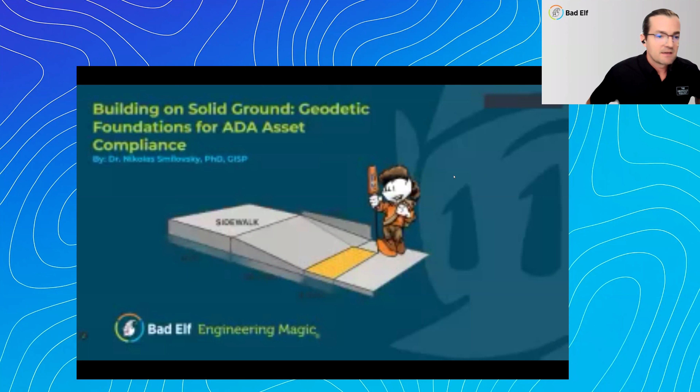I'm going to be our first presentation here. We're going to be discussing building on solid ground, geodetic foundations for ADA asset compliance. Our whole presentation from Bad Elf today is going to be really focusing on the importance of having a strong geodetic foundation to your ADA asset management.

So let's go ahead and jump in. We'll quickly do an industry solutions poll to see how everybody is feeling out there about the ADA world. We're also going to continue Tony's quick discussion on why ADA compliance matters. We'll segue into why accuracy, specifically spatial accuracy, matters for ADA compliance. We'll talk just very shortly about Bad Elf GNSS powered solutions.

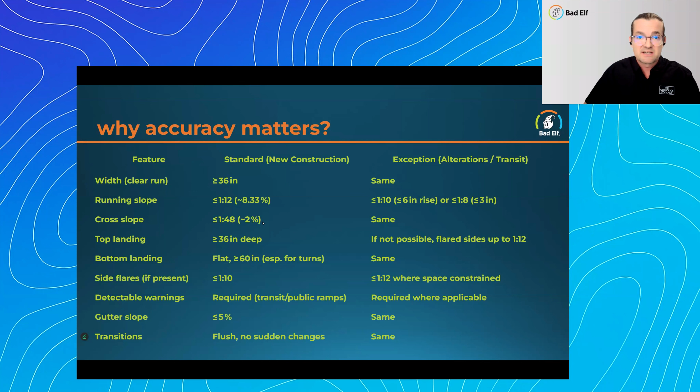If you're talking that a cross slope has to be under 2% grade, under 2% slope, that's a hard number to reach, right? And so if you're familiar with ADA, you've seen pictures like this and diagrams like this of different slopes and running slopes and cross slopes. But the point here I'm trying to make is this isn't super easy.

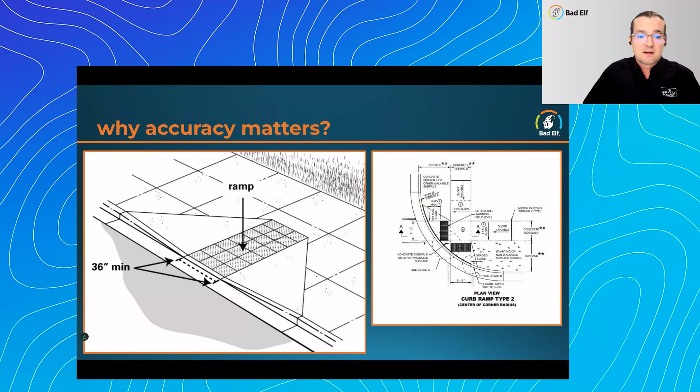This is a lot of data. There's a lot of stuff going on to properly capture these assets. And God forbid, if you are out of compliance, you could cause some serious injury, if not death, by having these things not be in compliance.

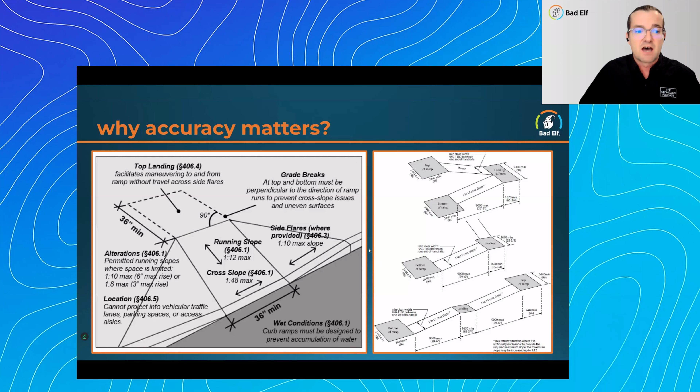And traditionally, ADA has been collected with all the traditional means, right? Literally levels. And by the way, about 7, 8 years ago, I did a fun study and I proved beyond reproach that a level on a sidewalk panel used 10 times by 10 different people on 10 different days will get you 10 different results.

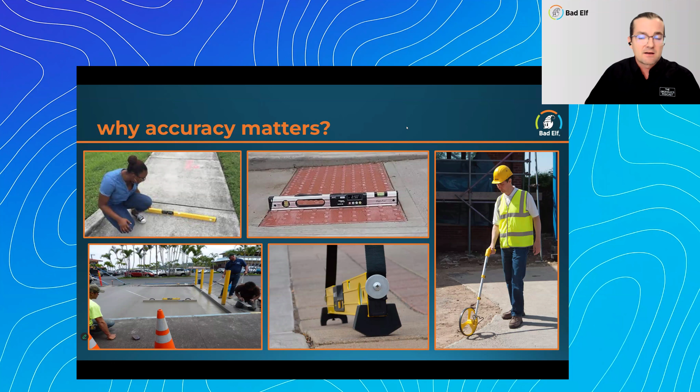So traditional means were complicated. You had to do a lot of manual labor. You had to transcribe these things by paper and maybe wheels, right? And so we have to figure out a better way to do this. And the accuracy here is hard to get.

It's also important to understand when we talk about accuracy, there's absolute accuracy, and then there's what we call precision. Absolute accuracy, aka where am I on the earth? How accurate are you, like if I'm standing in the sidewalk panel to say a known location on the earth, versus if I'm looking at a sidewalk panel and I need to know the slope of the panel unto itself, its repeatability, its precision, how good are the data unto themselves within the data set? Those are kind of two different things.

One tells you where the sidewalk is on the earth. The second one is able to tell you how accurate that slope is.

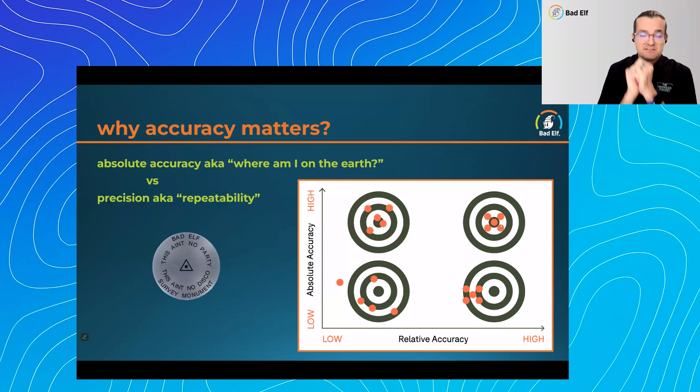This is a great diagram. On this axis here, you see absolute accuracy, and on this axis, relative accuracy. So down here in the lower left-hand quadrant, you have low absolute and low relative accuracy. Think about playing a game of darts and you're throwing the darts errantly all over. Or perhaps you have a very high accuracy here, or a better absolute accuracy, but it's not as tight. So the best solution is to have high accuracy and high relative accuracy. So not only is it positioned well on the earth, it's positioned well unto itself.

So how do we do this? Well, Bad Elf creates a bunch of GPS devices or global navigation satellite systems that are able to go out and collect survey grade data. These data can be attached into your data collectors, your phones of choice, whether you're using Field Maps or DeepWalk, or there's a bunch of different apps out there, and we're going to hear later about how different people during this webinar are collecting data, right?

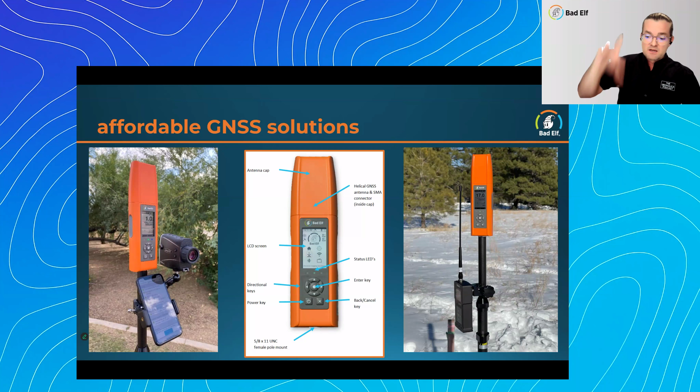The Bad Elf GPS, this thing here, it's just the device applying and supplying that high accuracy needed to meet your compliance regulations. And I'm going to sycophantically throw this out there that the Bad Elf Flex Mini Extreme can get 2 centimeters or better of accuracy now for only $1,500.

There is no excuse ever to not go have a GPS attached to your device out in the field, right? And if you're part of the government, you even get a discount on top of that. You're talking, it's as much as a big iPad, right?

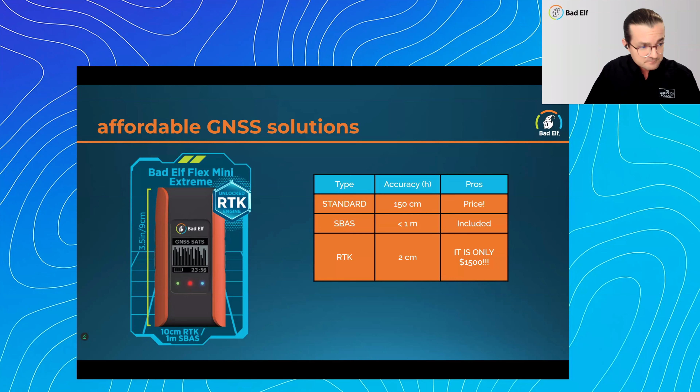And these devices no longer have to go on survey poles. They can be attached to phones and tablets. And again, I don't want to get ahead of some of our partners that will be talking here in a minute, but there's a lot of really cool ways to do this.

I also mentioned quickly that Bad Elf, we've got an exclusive partnership with a company called Pix4D. Pix4D is a photogrammetry and LiDAR processing software company used a lot of the time for drone mapping. But in fact, they have some terrestrial-based systems, very similar to what you're going to see from Brandon later. But this type of technology utilizes GPS to provide the accuracy.

So here's a quick video.

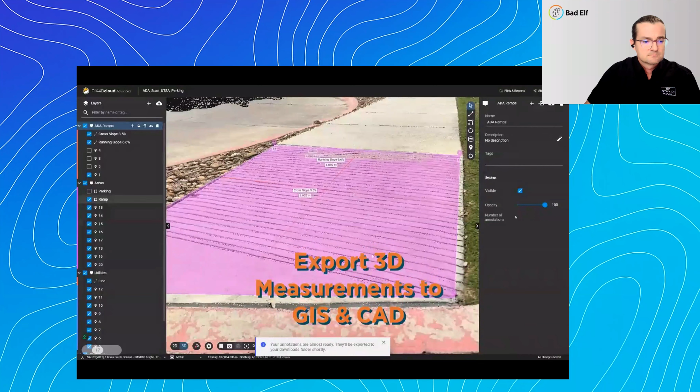Honestly, I just wanted to play that video so everybody would be awake after the music.

In the video, you saw a Bad Elf GPS attached to an iPad tablet being utilized here in San Antonio, Texas, for an ADA project. This is the new way we do it. Let me break it down for you in simple terms.

Bad Elf GNSS provides your data collector the accuracy and precision it needs to complete your ADA asset mapping project within compliance. We're affordable, accurate, and versatile. It's time to revolutionize your ADA compliance today.

No longer should you be taking out paper and pens and pull tapes and levels. You should be taking out a GIS solution that can collect high accuracy data that is very repeatable, and it's going to be able to stand up in a court of law.

So how do you get there? Well, we can help you at Bad Elf. We have an enablement team. Let us get you to zero to hero. We do all the custom trainings, no matter the app you're using with our devices. Additionally, we have an online learning management platform, an LMS, that we've created for all of our first-time users and anybody that needs a refresher. Our goal is to make it as easy as possible for everybody.

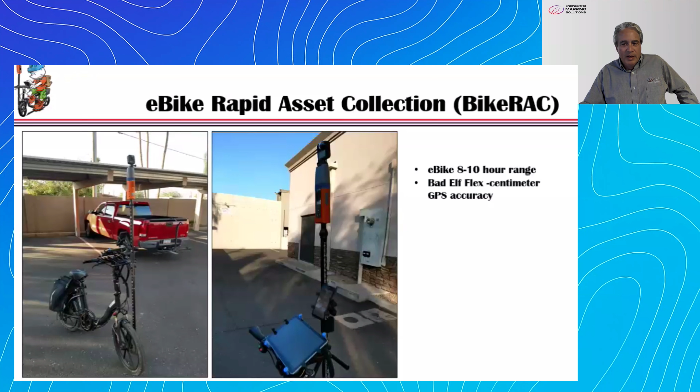Let's talk about the e-bike. You get 8 to 10 hours range, and I can tell you from experience, that's way more than you need—your legs hurt, your butt hurts. 8 to 10 hours is way more than enough. We're using the Bad Elf Flex to get sub-centimeter accuracy, which is very nice in the field. One of the things Nick says that's kind of cool is, why would you do without it? If you can get it, why live without it?

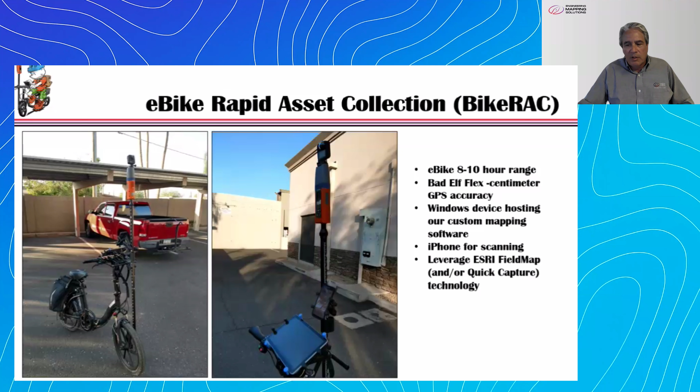We leverage several Windows-based custom solutions here. You can see that we have the iPhone here for scanning. We have a Windows-based device here on the front that helps us with our custom mapping, and we leverage either Field Maps with custom configurations or Quick Capture technology.

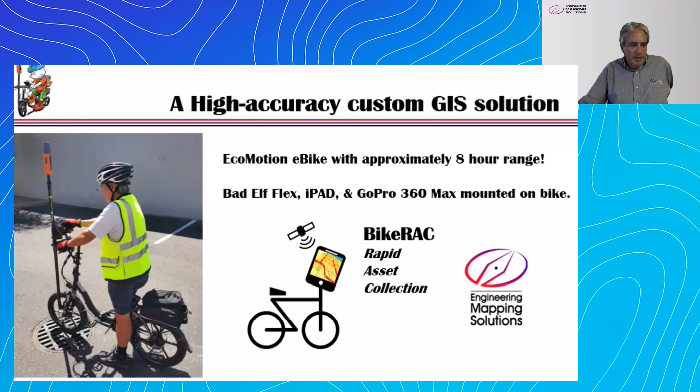So yeah, we get 8 hours on the bike with the GoPro imagery. And so that kind of looks like me, that elf. That's me right there.

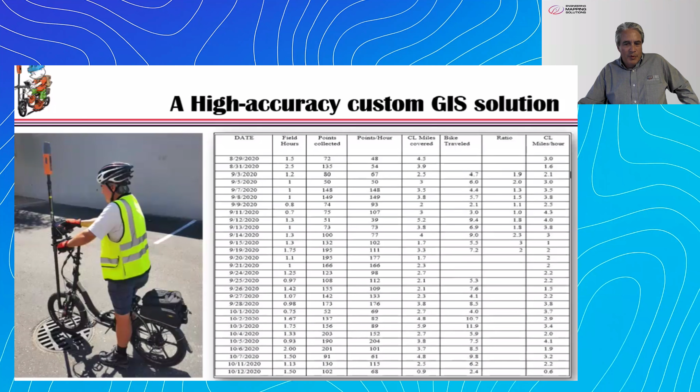I don't expect you to read through this. This is just one of our jobs we did back in 2020 that shows the amount of field work versus what was collected. We averaged about 80 high accurate GPS survey points, sub-centimeter, per hour. You could do the math.

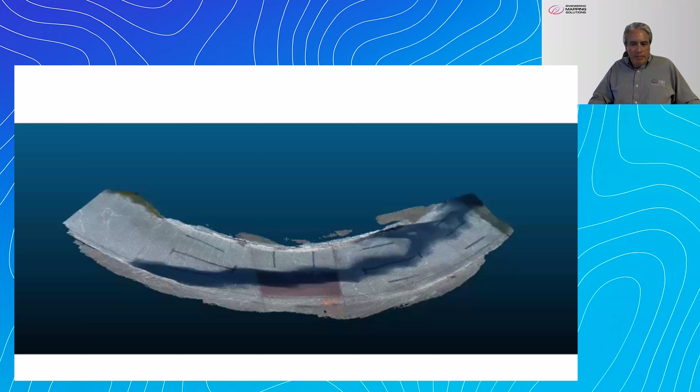So how do we approach solving the problem? It provides interactive panoramic views from various locations. I don't know if that happens to you, but my phone thought I was asking it a question and started answering. So we settled on software—there's a couple we considered.

One was 3D Scanner and one was Scaniverse for the iPhone. You can certainly Google either one of those, but let me save you the trouble. Scaniverse is a free app that does 3D models leveraging the smartphone's LiDAR sensor. And probably the first thing that jumped out at you, it's free. So that's kind of cool. The entry into this technology is very nice and affordable.

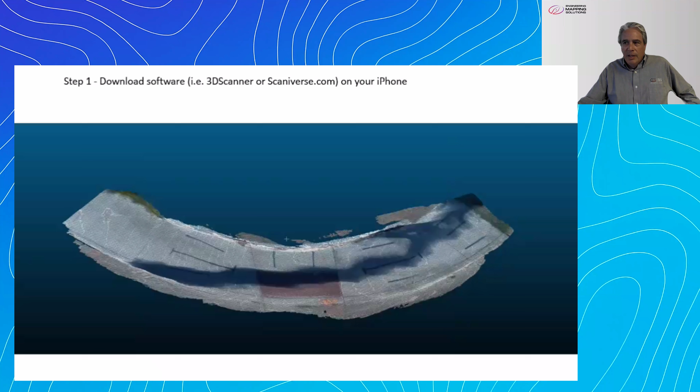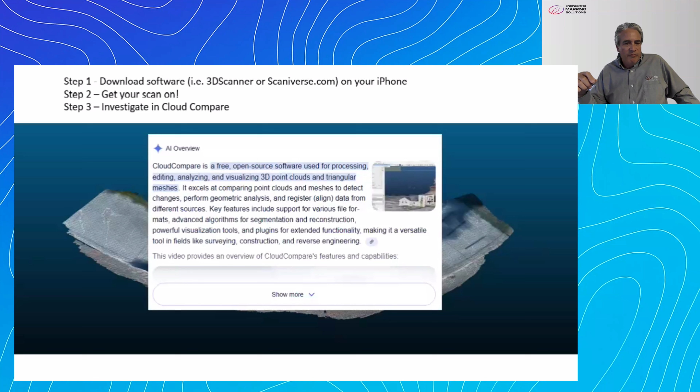So once you get your Scaniverse going, you get your scan on, and what you're looking at here is a scan that I created using Scaniverse, and I'm interrogating it in Cloud Compare. Cloud Compare is free, open source, and we use it to process the 3D point clouds.

So what I did is you can see the lines that I've drawn here on the ramp, and I scanned it so that when we do measurements, I could cross-verify against the actual measurements we did in the field.

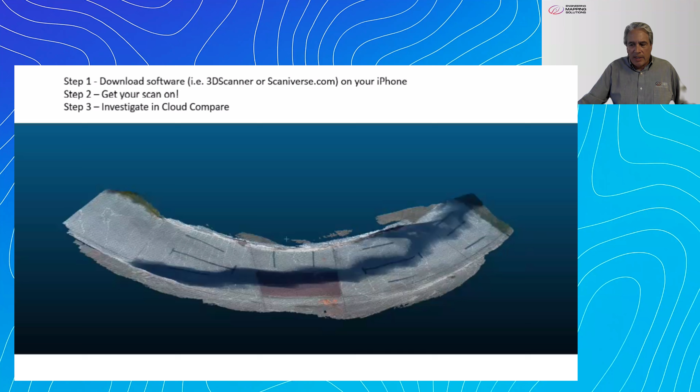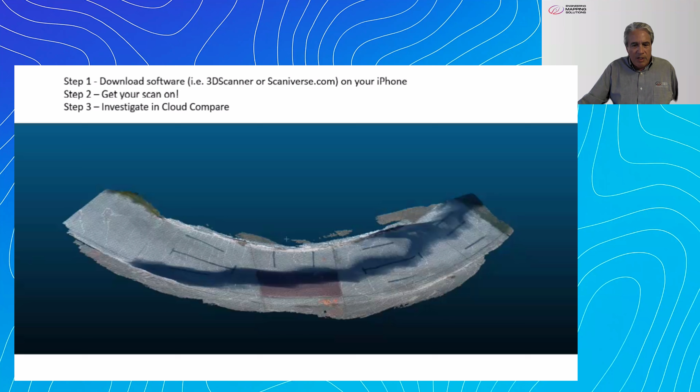So just to get a sense of how accurate things are—it's really nice that Scaniverse gives you an RGB image like we show here. But if you zoom in, here's where the rubber meets the road: those are the LiDAR points that have XYZ on them that we can use to do our analysis.

So that's pretty cool. But let's see how we did. I told you I drew lines, and I've got the names here: the left approach, top, mid, bottom, and I kind of measured it all out.

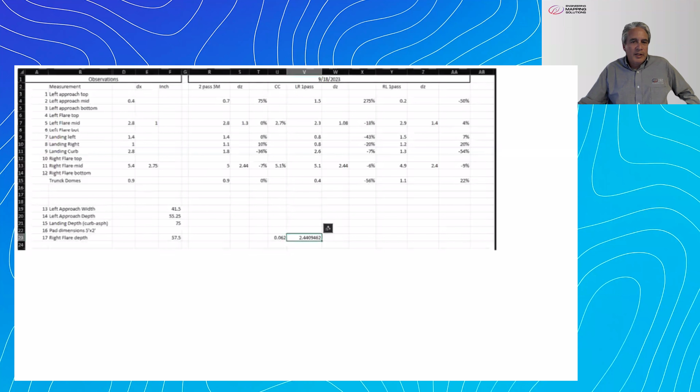It's not so much to look at these numbers—Brandon in the next presentation can talk to you about accuracy. What's important is I brought this data into QGIS and analyzed the point cloud and did measurements, because at the end of the day you could see here, we have the X, Y, and Z.

So I wrote some Python custom tools in QGIS to allow us to pick two different points in space, and that's how I got these measurements you see up here as we compared the results. That's really where the rubber meets the road. That's how we do our collection.

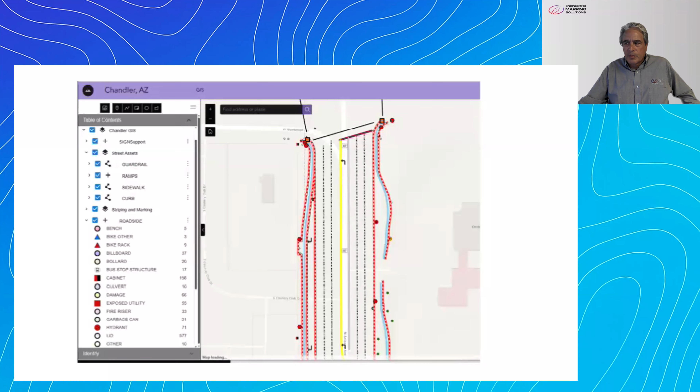So let me bring this to closure, because I've lost track of time since I don't know how deep into it I was before I started the slides. But let me just close with these conclusions. The first thing I want to re-emphasize is we focus on field collection, getting the raw data, and leverage the office for building the data.

Secondly, we leverage the hardware that best fits your budget. And in our case, cell phones and GoPro, and of course the Bad Elf technology, all well within reason.

So the last thing I'll leave you with is what I like to say: stay in your lane. Do what you do best and hire the expertise that focuses on vertical markets.

Nick and I have been working together forever. We have common clients. We've built a relationship over the years that just benefits us both. This is a perfect segue into our next presenter, because I just met Brandon last week, and he and I met remotely yesterday, I think, or maybe Monday, and I'm looking forward to working with him as well. So with that, let me introduce to you the founder of DeepWalk, Brandon Yates.

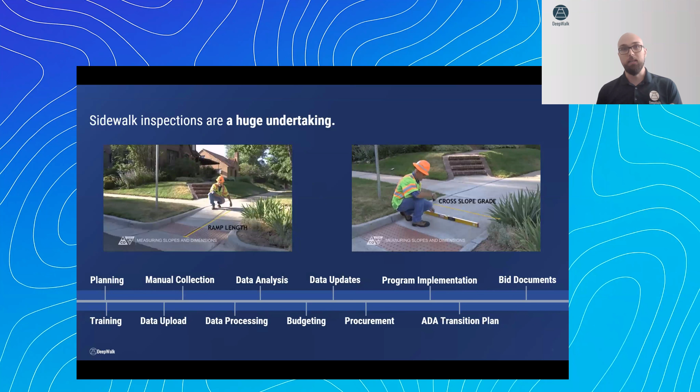A huge challenge in ADA transition planning and self-evaluation is this manual inspection process, where we've all talked about how challenging it is. But one thing that's overlooked quite often is all the different steps. Yes, checking the slopes and widths and areas and different things like that is slow, but also planning for your data collection, training your data collectors, and then once you have all that information, trying to make it useful, make it easy to update, make it possible to get into budgets, compile it into your ADA transition plan, and then most importantly, create bid documents to go and fix the issues that you found.

And that's what inspired our company. We got started in 2021 because when you collect the data by hand, typically you end up with either a digital or a paper checklist. And it's very hard to go from a checklist into a curb ramp retrofit program, or a trip hazard removal program, or vegetation removal, or remove and replace. There's just a disconnect there. So you end up having to go and collect the data again to implement your program.

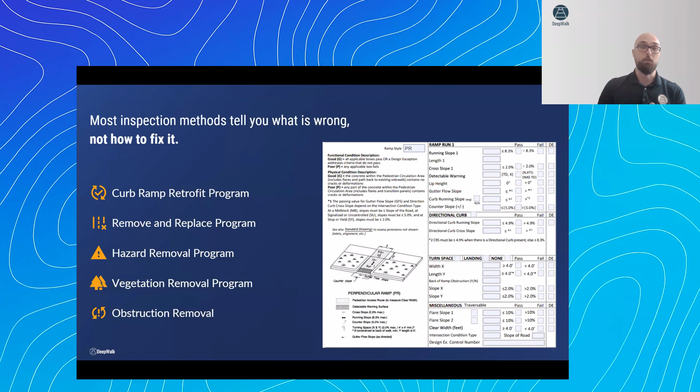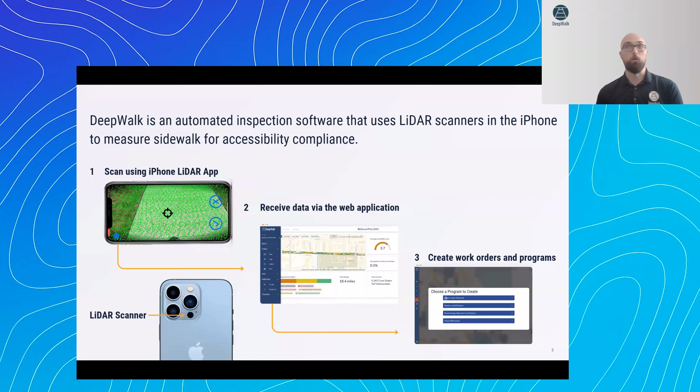So we built a mobile application that uses the 3D scanners on the iPhones, where you scan sidewalks and curb ramps. It makes a 3D model, checks all the slopes and widths and areas and deterioration and things like that, and puts that information on our web application where you can look at the dashboards and different maps to identify your priorities, and then actually go and create programs and work orders to fix the issues that you found.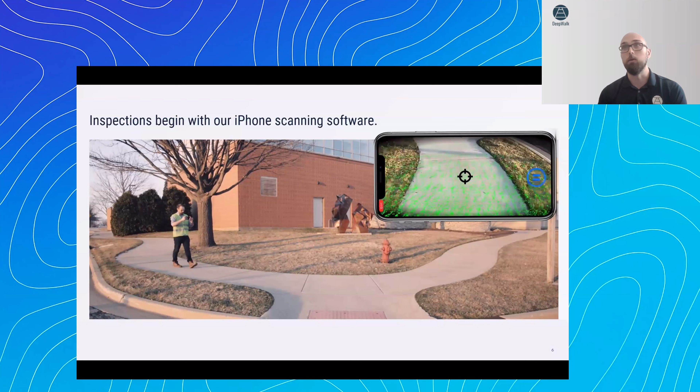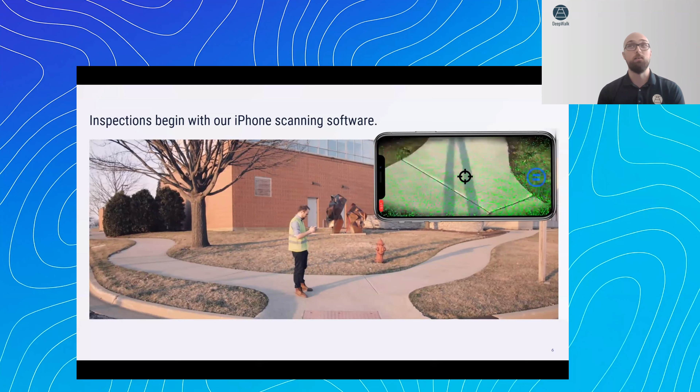So this is what it looks like: you just point at the sidewalk and scan it. We're getting about 1.5 miles per hour when you do the sidewalks and the curb ramps. Most importantly, it requires very, very little training. We have a 20-minute training on our website, and most of our data collectors are interns or people who just wanted to take a break and go outside.

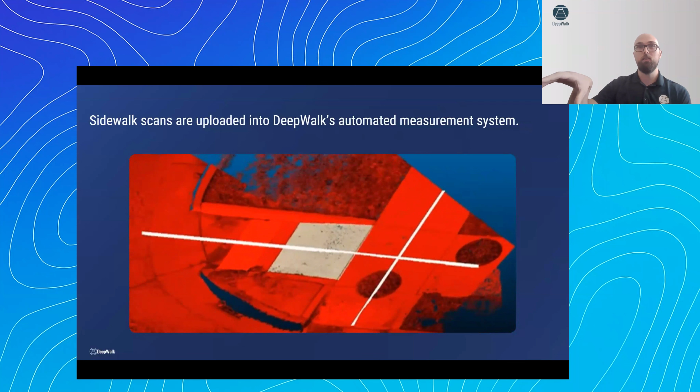So while you're scanning, our system makes these 3D models, and we use machine learning to cut out the panels, identify what types of panels they are, the path of travel through the panels, the detectable warnings, deterioration, all that good stuff. Then it goes to our web application where you can track your data collection, create those programs, do your long-term sidewalk planning, and most importantly, we have a very robust ArcGIS integration where you click a button, log in with ArcGIS Online, and it copies all of our data into ArcGIS Online and pre-formats it for you.

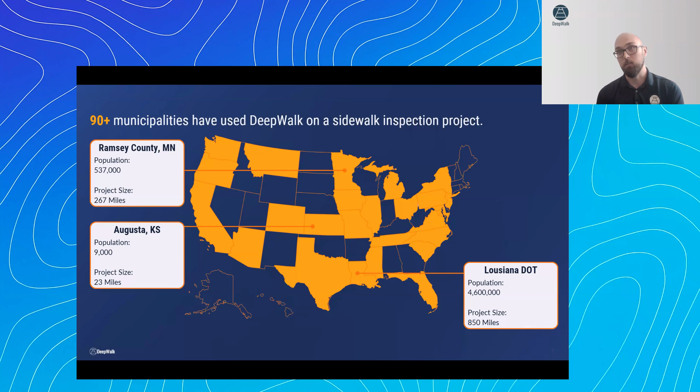We're in over 90 municipalities across the country, and we've been able to serve the entire spectrum of municipality size. Our smallest customer has a half-mile sidewalk and a population of 400, and our largest customers are Louisiana Department of Transportation and Spokane, Washington. We also work with over 20 engineering firms that offer DeepWalk as a service.

A very common question we get is like, okay, we still have to walk it, how fast does this go? So about 1.5 miles per hour per person. Something to consider is it's so easy to train people that we can scale data collection up and down very easily. So very often we'll work with a municipality and they'll have 5 interns out collecting, getting 40 to 50 miles a day.

You can also collect with three different general project formats. You can use your internal staff to do the data collection, you can partner with us and we'll send out data collectors to collect that information for you, and we also work with our different engineering firm partners who offer a complete transition planning service.

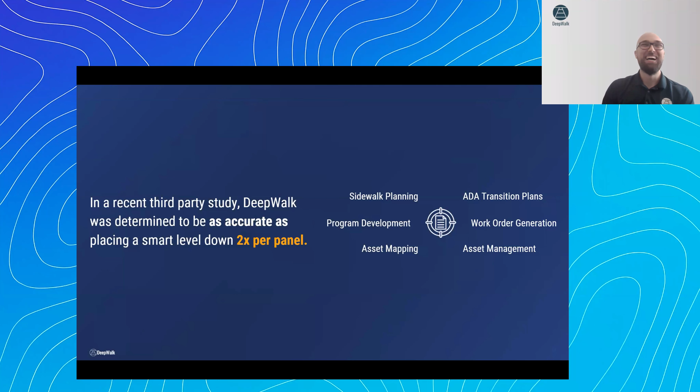We also have a custom manual tagging system where you can go and add different fields that we don't automatically collect, and just tag those yourself while you're in the field. There's a crosshair in the middle of the iPhone app, and you press a button, it shoots a tag, and it records it in the system.

I'm going to jump into some case studies that are pretty interesting. Genoa, Illinois is one of my favorites because they're a relatively small community and they don't have any GIS people, so they need to be able to manage their sidewalk programs without having GIS expertise on their end.

This is an example of a trip hazard removal program that they created with DeepWalk. Here's all the trip hazards that were identified in the system. They went through, you can filter by severity. So here's the big ones. Say we're going to go and make work orders for this area, select them out. We've got them all listed here.

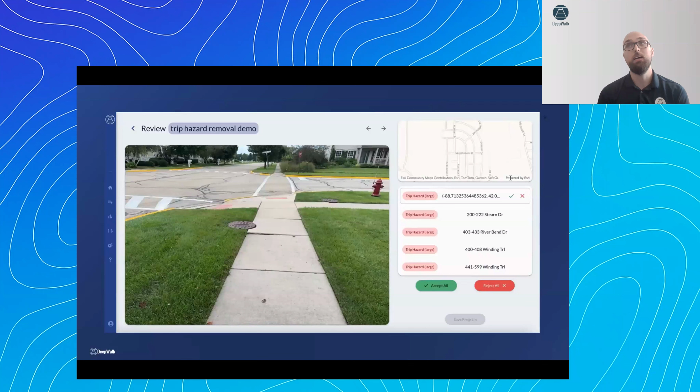Here's a picture of them. And then you can go through, call it your trip hazard remove and replace program for whatever year. It brings you to this screen where you can quickly review all the trip hazards that were identified, so make sure they're actually things you want to remove. Then you can either export it or just save it as a dashboard within our platform.

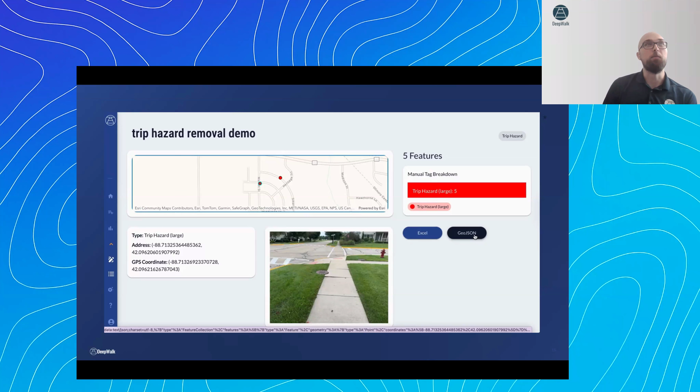You can export it as different file types later, maybe move it to Esri, move it to whatever asset management platform you currently use, or you can always just put it in Excel and print it out. So yeah, Genoa, Illinois uses this for their trip hazard removal programs every year, and they're also working on a remove and replace program and a vegetation removal program.

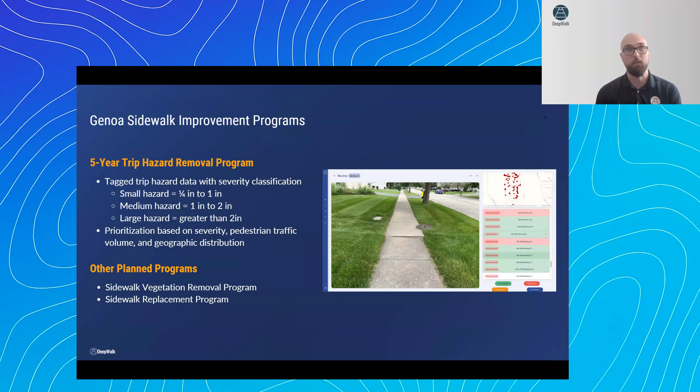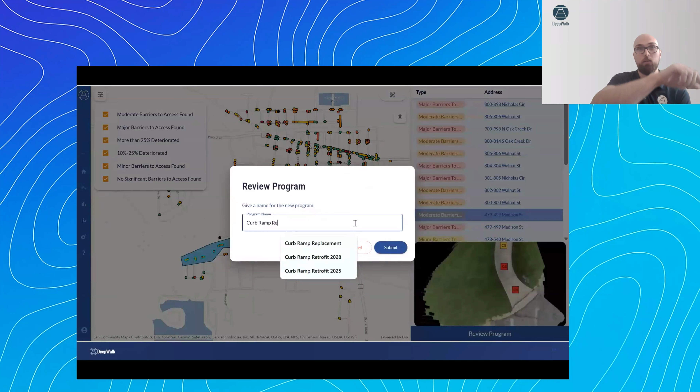Here's a new feature we just launched a couple weeks ago, focused on curb ramp retrofit programs. So this is all your curb ramps. You can select those and filter, say we're doing a resurfacing program along the street. You name that, and then it'll pull up the top-down view of each one of these curb ramps, and you can actually take a look at the slopes on every single panel.

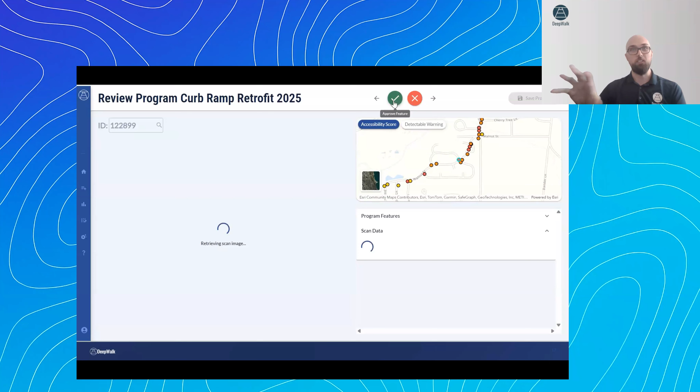And determine whether you want to add this to your retrofit program. You can use your engineering judgment while going through here and determine whether they meet the criteria of replacement for your specific project. It's great for scoping. So you flip through all your curb ramps, and once you're done, it goes to your program list where you can go through and export that as Excel, GeoJSON, or other formats. So that's a good way to make all your ramp programs.

Say most curb ramps are replaced along with other projects, so this allows you to do that very easily.

Another reason why we like Genoa is they put all of our information on their website and kind of brag about all the sidewalk work that they're doing, and it makes the citizens, the locals, happy. And then if the Department of Justice comes and asks what they're doing for their sidewalks, they just send them a link. So they're just doing a great job.

We have two pricing models. We've seen the most success when communities do a small amount of data collection every year, and we have a subscription model to support that. So you can get a 15-mile-a-year package or 20 or whatever. It allows them to not get overwhelmed with the amount of data they have. The cost is relatively low, and when they find issues, they can actually right away make a plan to fix it.

We also have a per mile pricing model. So if you just let us know how many miles you have, we'll let you know how much it costs.

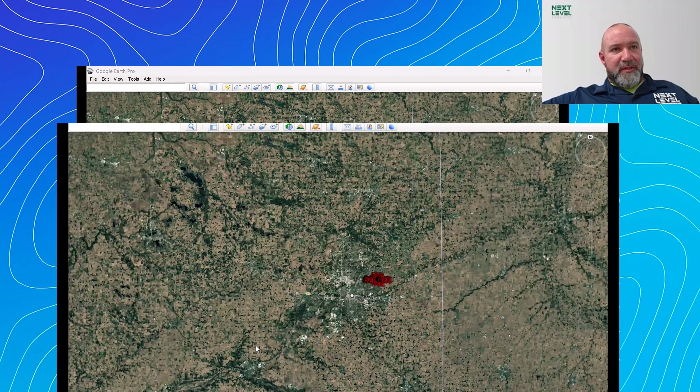We were able to mark out exactly the trip hazards, the areas we were working on, and the sections that were beyond repair and needed to be removed and replaced, versus what was getting grinding versus lifting. That way they knew this was for the private walks of the addition. We also do the streets for the city, but this was strictly the private walks behind the houses and the golf course and that sort of thing.

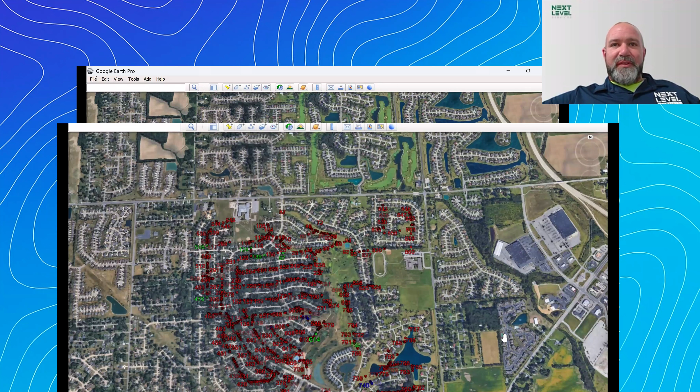We were able to go in—I was just learning the program at the time, so we used a low accuracy setting. We had the option to use higher, but I was still learning it, and I guess being impatient too with it. So we were able to go right in and see.

There's an area here called Rocket Hill that we were able to see, and you can actually see on Google Earth the areas that we had already removed and replaced, versus the sections that needed lifting and or grinding, and then sections that had yet to be removed and replaced.

I'm going to back out of the screen. So yeah, that was a very good tool for us.

We have our own way of checking—a quarter inch is ADA standard for trip hazards, half inch if it's a beveled edge. We rarely run into beveled edge, going off a quarter inch most of the time. And then you have the 2% slope that we run into, as well as mapping truncated dome areas where they have the ADA mats.

One of the things we've run into, and are starting to do, is with truncated domes. When concrete's poured, the common ways of doing it include stamping in—you're probably familiar with truncated domes, the red mats with the beads that stick up. There's also an actual mat that can be set in while the concrete's setting up, held with bolts, so that after it cures, if it needs to be removed or replaced due to damage from something like a snowplow, it can be pulled off and replaced.